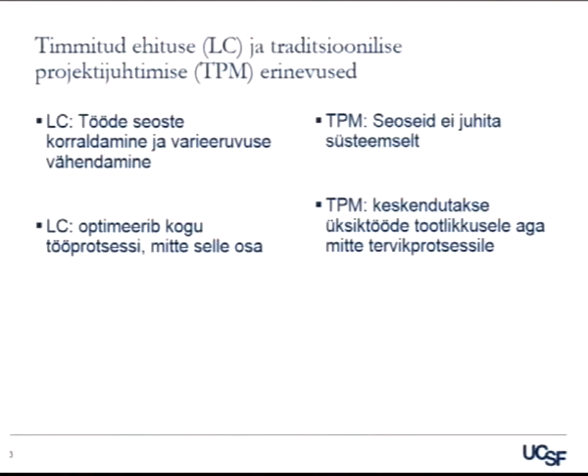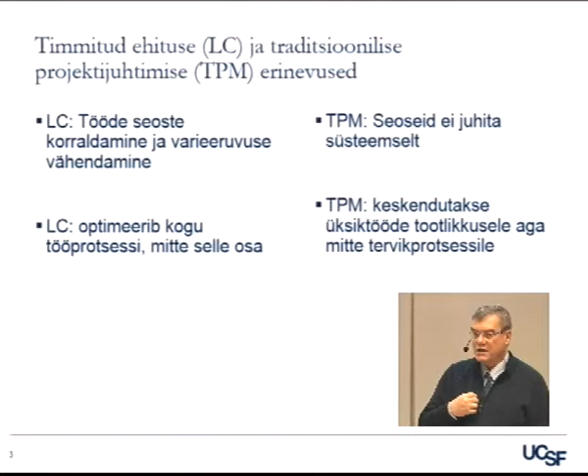So some differences between lean construction and traditional project management. I've put these slides in for you to read at another time. I don't want to talk through each one. I think it's pretty evident what the differences are. But on this first slide, the two points about lean construction, managing the interaction between activities and their effects and optimizing the workflow, is for us the key fundamental philosophy.

Why do we do this? It's because the problems that we have had in the past with design and construction of buildings all result from the old process, which cannot do these two things. And I am both the person who conducts the orchestra, and I am the impresario of the circus, and then when the circus parade goes by, I go and clean up.

So when a project finishes and the results were not satisfactory, I have to fix it. So I am involved in lawsuits, litigation, and I hate that. So with Lean, we've stopped having to do any more cleanup after the project.

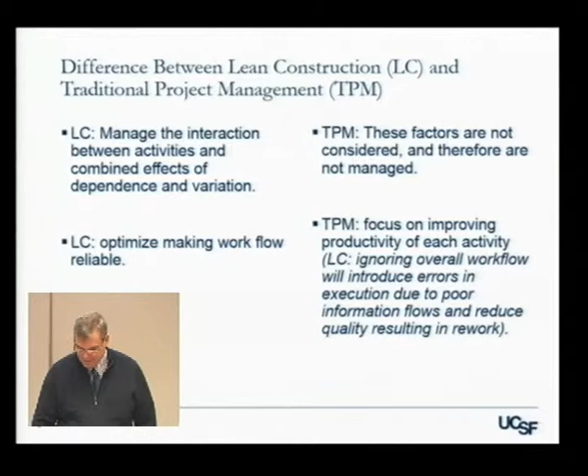So there are 4 slides that talk about the differences. What Lean construction tools do you have to accept in order to get the benefits from this process? The first one that I put is shared project control. In traditional construction, at least in America, the control is a value that the owner or the general contractor try to monopolize. And to do Lean, you have to share the control of the project with the people who are doing the work. And in sharing that control, they take responsibility. That's a fundamental principle that makes this whole process work well.

We try to optimize the whole system through collaboration and learning. We seek continual improvement, although we know that perfection is impossible. We focus on delivering a project that is desired by the owner. In this case, the owner is a community. We are an academic community, and the asset, the building, needs to support the way that community works. This is a complex question in design, and if you don't have a project that is focused on this, it will fail.

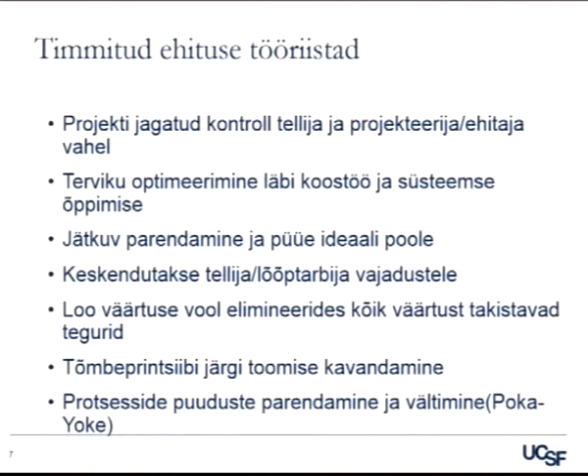We try to create value flow, or the flow of value into the project through the decisions that are made by the designers and the builders by removing obstacles to the creation of value. We try to create pull production, and we try to mistake-proof the process. All of these are very large subjects, and when I look at our projects, I do not feel like we are experts. We are just beginning to learn how to do this.

With the last planner system, developed by Professor Glenn Ballard, Greg Howell, and Lauri Koskela in Finland, we use this throughout our projects.

We first create a milestone schedule, and then the community process of doing the design and construction begins. The people working on the project collaboratively pull schedule each milestone phase, and the list of tasks they need to fulfill is under the weekly last planner workflow management process.

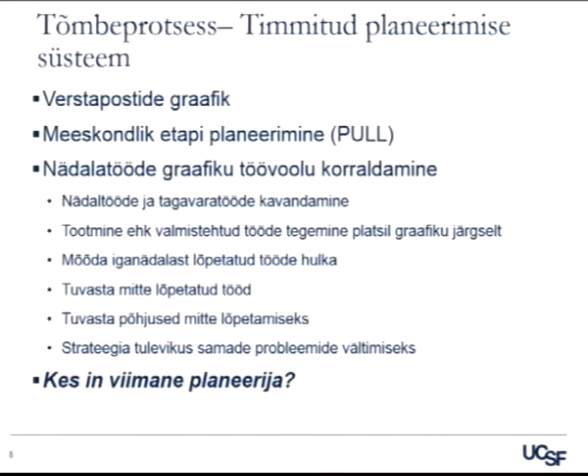But I want to ask, who are the last planners? The answer is the people working on the project. The point of the last planner system is to push control of the process down to the people doing the process. So when you're in design, as Romana will talk about, it's the people working on the design who are scheduling and managing the process. If you're on the construction site, it's the people doing the construction work who are managing that process. The lower down you can push the responsibility, the better the outcome.

We use target value design to design our facilities. This is the result of about 8 years of experiments.

We build buildings that we will use for hundreds of years. In fact, we have a project right now to renovate two buildings that are 100 years old for the next 100 years. So when the university builds an asset, it builds it with the intention of keeping it forever.

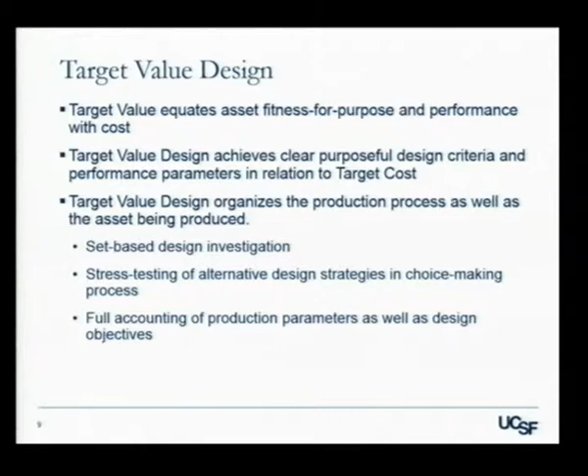This is very important because fitness for purpose is really the definition of value. We try to develop clear, purposeful design criteria and performance parameters that designers and builders can use to know what value they are creating. I will use the example of the building later to talk through this process.

Target value design organizes the production process as well as the asset being created. An example of this, which I'll talk about later, is the office building. It was a design-build competition, and on day one, the people who were going to manufacture and install the exterior of the building were at the table with the architects, helping to design the building, so that the deepest technical questions were being addressed from the very start of the project. This is very desirable.

We use a big room organization on our projects. We are lucky enough to have enough land to make a big room. Sometimes this is a challenge - where do you put the construction trailer that becomes the design office as well as the site office? But what we are trying to create is an integrated team workplace.

We are a very large business, in fact. We receive more than half of our revenue from clinical services. We operate 2 hospitals of our own, and on February 1st a third will open. We also provide the doctors for 2 more hospitals in San Francisco. So right now 4, and soon 5, large hospitals.

And we receive a very small amount of money from the state to fund education and some collaborative research. So we are almost a completely private institution.

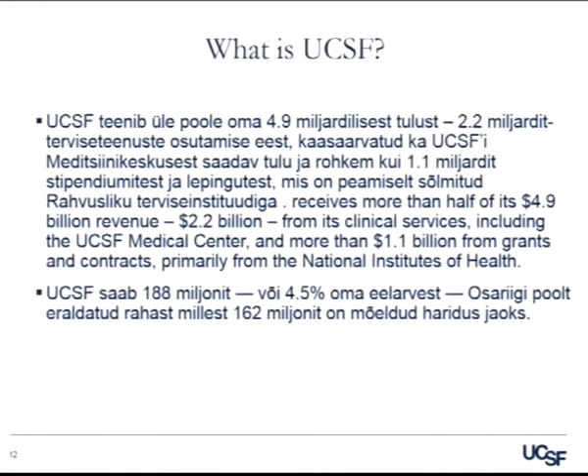We have many sites in San Francisco, 3 main ones: our Parnassus campus, which is the traditional core of the university; a new campus at Mission Bay; and a small campus at our Mount Zion Hospital.

We are an urban campus. Other campuses in the UC system are buildings in a park, all in one place, with green lawn between the buildings, and it's very nice. Our sites are mostly urban, with a completely urban character. That means we have a deeper relationship with the city of San Francisco in terms of planning than our other campuses.

This is a large enterprise, and we have many challenges, one of which is that we do not have enough capital for all of the purposes that we need. We are growing a new research campus at Mission Bay, and yet we are reinvesting in our existing facilities.

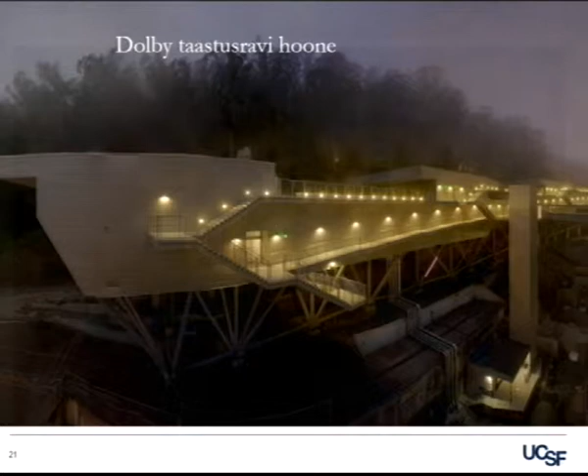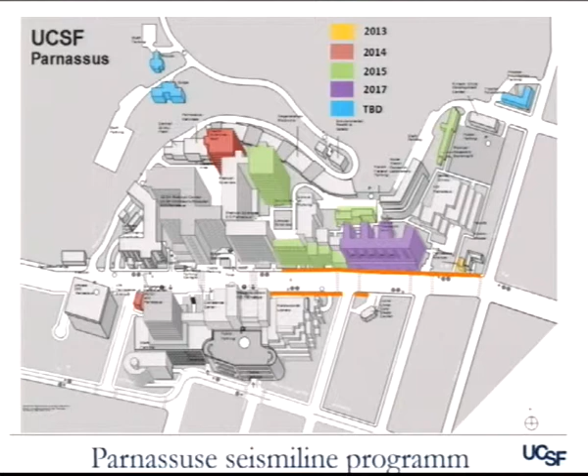So for major projects, for projects that are hard to do fully design build, we use the CM at risk with design build subs. And then for new standalone buildings, we use the target value design build.

So what is target value design? Target value design is a practice that tries to deliver what the customer values and develops the design within project constraints. That's a very abstract way of saying it. A more poetic way is an application of engineer Ohno's advice to lower the river to see the rocks, to self-imposed necessity as a means to innovation and continuous improvement. Engineer Ohno was the man at Toyota that developed their version of lean. It strives to reduce waste and rework in the design estimate redesign cycle.

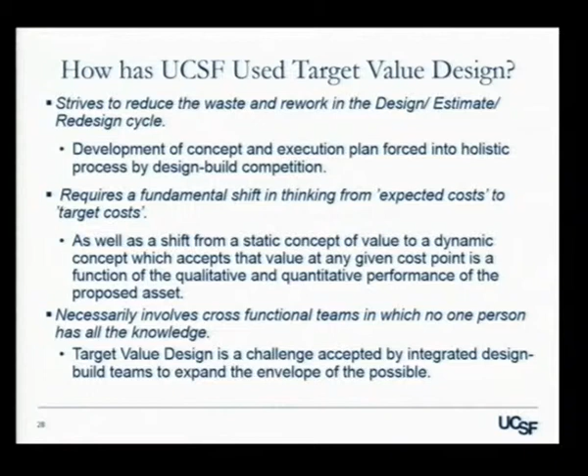We are using in this process a dynamic concept of value, which accepts that value at any given cost point is a function of the qualitative and quantitative performance of the asset. So we're regarding a building as an asset. It's something that is going to support our medical research, our clinical care for 50 to 100 years before we really renovate it. And we want to know what we're getting for the money. And so this is how we do it.

Target value design is a challenge to design build teams to expand the envelope of the possible. So the cost that they will get for the project is fixed. The variable is how well does it perform.

So we use maximum allowable cost as our design build cost target. The competition for the project award is used to maximize the building performance for a fixed cost. The performance specification allows measurement and valuation of the asset performance quantitatively. We translate it all into numerical values.

The design criteria allows measurement and valuation of asset performance quantitatively, and we use a ranked scoring system so that the top ranked proposal gets 100% of the points in any one category. The second ranked proposal gets 2/3, and the third ranked proposal gets 1/3. And this takes bias out of the judging process. Usually it's much easier to say which proposal performs best, and then the points come automatically.

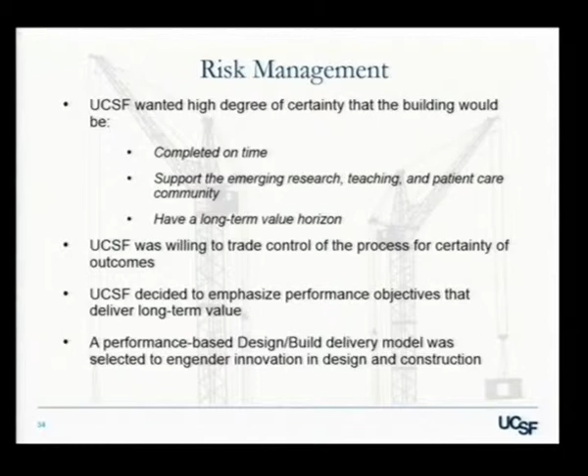So I want to talk a little bit about risk management. Because the hospital was going to open on a date certain, we needed this building to be completed on time. We needed to support the research, teaching, and patient care community that would be in the building and have a long-term value horizon. We were willing to trade control of the process of design and construction for certainty of outcomes.

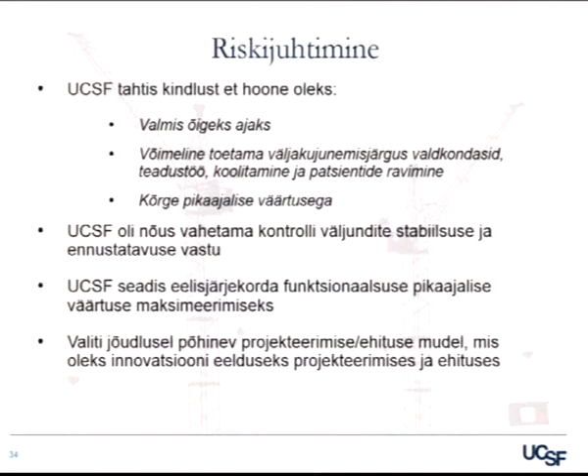We decided to emphasize performance objectives that deliver long-term value, and so that's why we decided to use this delivery model. As I mentioned earlier, we have a 3-level performance specification that we use for a design-build competition. The tiers allow us to categorize performance. We had a fixed cost of design and construction of $93.8 million, including furniture and a high specification IT system.

We had a fixed program. We used a best value process to award the contract. Basically what that is: score the proposals, divide the score into the cost, and award based on the lowest cost per quality point. In some projects, it would not be a fixed cost, and the winner might not be the lowest cost. But in this case, we had a fixed cost, and so it was really who got the most value into that fixed cost.

This is important. The contract is to design and build a building with the specific performance levels proposed in the competition submittal. So often a construction contract is to build a building, and the design contract is to design a building, and somewhere in between the two, a guarantee of performance is lost. It's very hard to enforce. This contract, the guarantee of performance, is very simple to enforce. If they don't meet it, I make a phone call. They come and fix it. It's a huge change in a country like America where everyone is fighting all the time with lawyers.

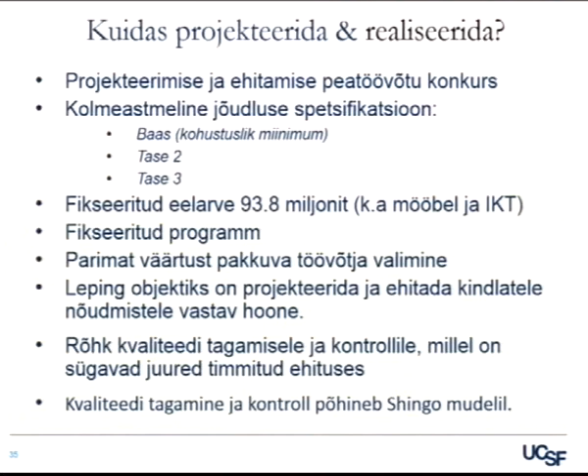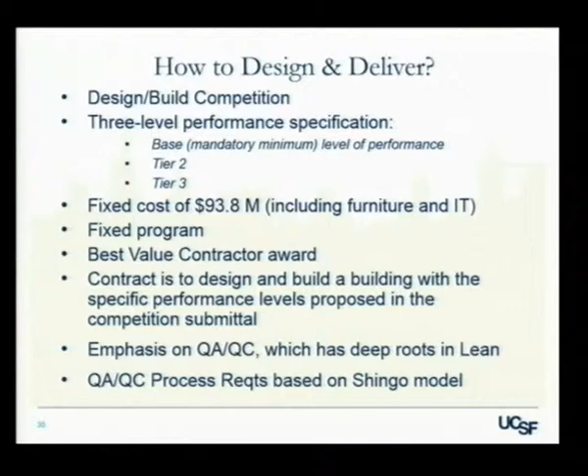Our contract emphasizes a quality assurance, quality control process, which has deep roots in Lean, and we actually use a pretty straight Shingo model. Shigeo Shingo was one of the originators of Lean in the automobile industry in Japan, as a framework for asking the team to create a quality assurance program for the project.

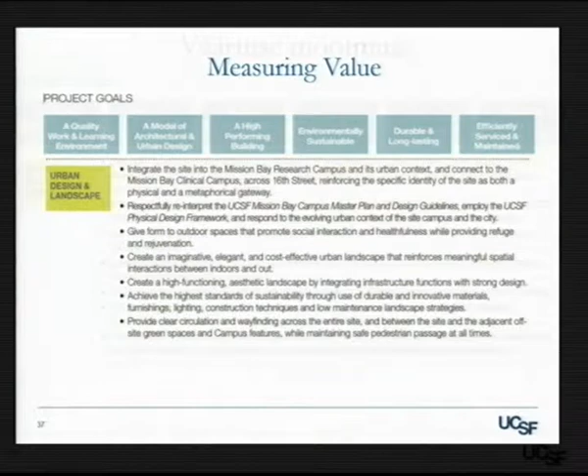So we developed planning and design criteria, 400 pages. I can't go through all of that in this talk, but this is the very highest level of performance setting. We wanted a quality working and learning environment, a model of architectural and urban design, a high-performing building, high level of environmental sustainability. We wanted it to be durable and long-lasting, and an asset that we can efficiently maintain. Those are the various highest level expressions of the performance desire, and then we work it down and down with more and more detail in the document.

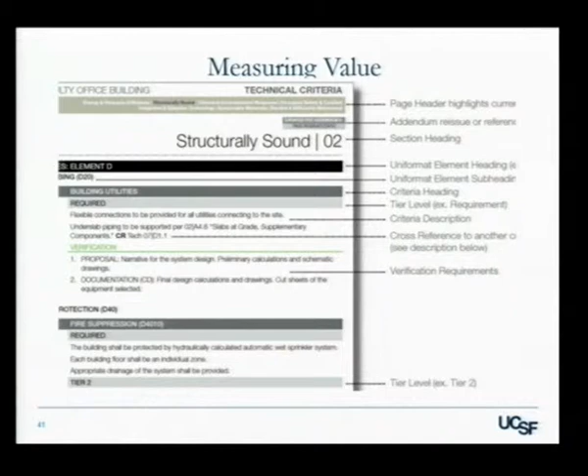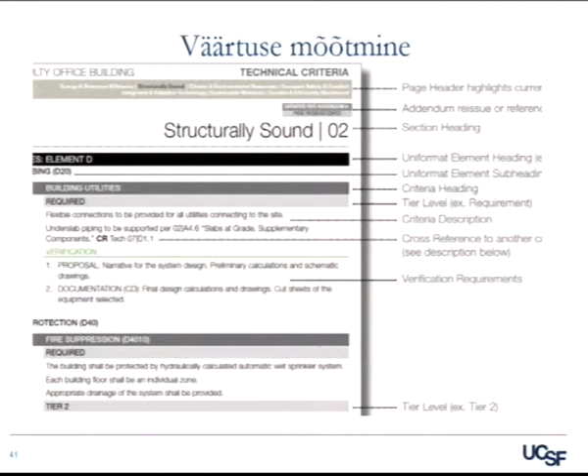Just an example of a page from the technical criteria, this is around structure. We required a very sophisticated structural design methodology that uses what we call a non-linear analysis, which is a 3D computer model that is stressed with known earthquakes repeatedly, and then a Monte Carlo simulation is built out of that. So many thousands of times with 6 or 7 different earthquakes, and then you can see probabilistically how the structure will perform, and then you can make modifications that address the issues that come up. This is just an example. I can share this document with people if you're interested.

Then the consulting team evaluated the technical criteria. We worked with the users, a group of 27 faculty members, to evaluate the design quality and the way that the interior is designed for fitness for purpose. We published the evaluations for each of the 3 proposals, and then we did a ranked scoring exercise. This is a score for one of the contractors, and we enumerated how many times they met the base or required level, how many times they did not, and how many times they met Tier 2 and Tier 3, which are 2 higher levels.

I'm going to have to take my sweater off because it's very hot while I'm wearing it. It's standing by the radiator. That'll do, that'll work.

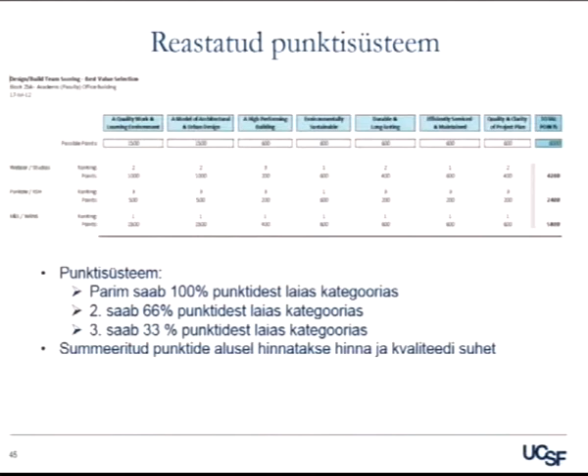Then we compared all 3 against each other, and did the calculation of the cost per quality point, and we had a winning team. What we got for our money was quite a lot. This is a cost that is below the private sector cost in San Francisco for a similar project. The structural performance is much higher than code requires. Immediate occupancy is actually a technical description in California structural engineering. It means that for a given class of earthquakes, you can walk in and use your building. Not only is the structure fine, but all of the non-structural systems, the IT, electrical, and plumbing supports, no broken pipes, no broken wires, the building works, it's still watertight. California has the toughest energy code in the US, and the performance of this building is calculated to be 25% better than the energy code. And most important, the faculty committee evaluated the winning proposal highest of all for workplace design.

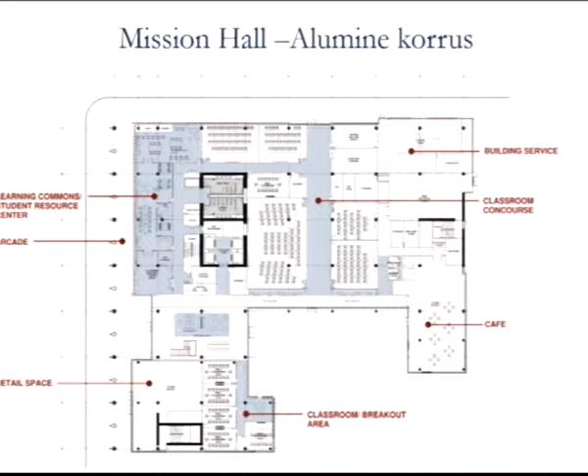The ground floor is mostly classrooms and some retail and the back of house support space.

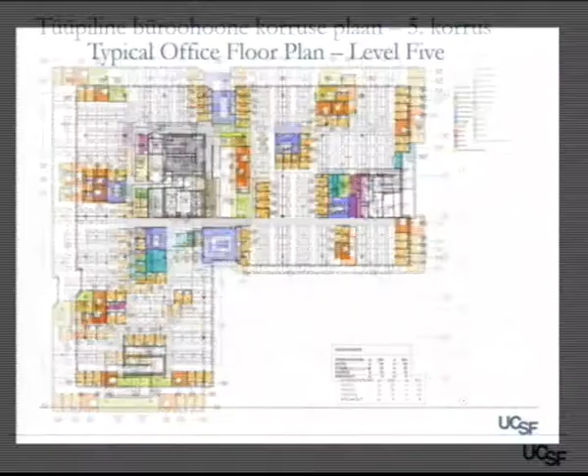A typical office floor won't look like anything you've seen, because this is an activity-based workplace. Nobody has a private office. All the senior faculty have open office workstations just like everybody else, so space is not part of the academic reward system anymore. If you need privacy, you go to one of these little yellow rooms whenever you need it, no reservation, walk in, work for a day or half a day, have a conversation with somebody. When you're done, you leave and go back to your desk.

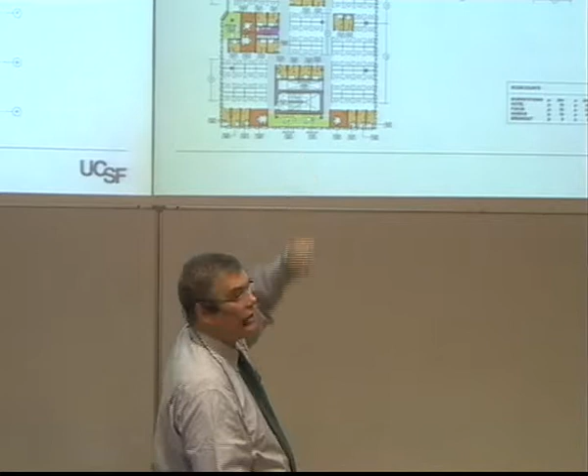If your team needs a place to work, you can grab one of these, no reservation needed. Only the larger, bluish rooms need a reservation. Most of the time, the people who have a desk here are working in the hospital, delivering medical care. They come here 2 hours a day.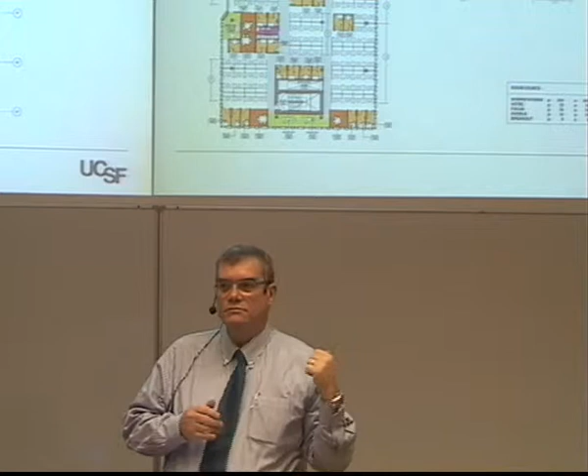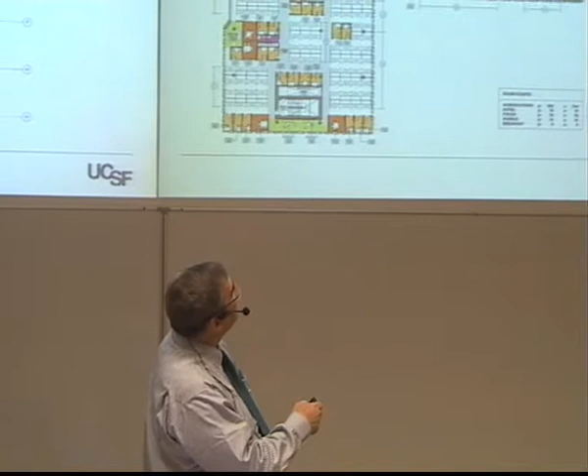So they'll have their academic workplaces here, but if they need to write a paper, they might take one of these rooms, or this one, or that one. It's fine.

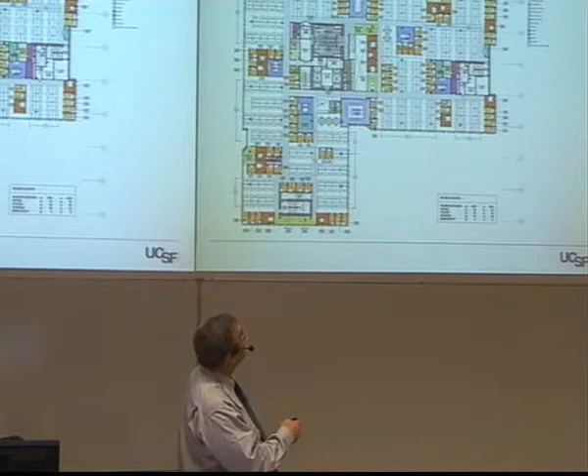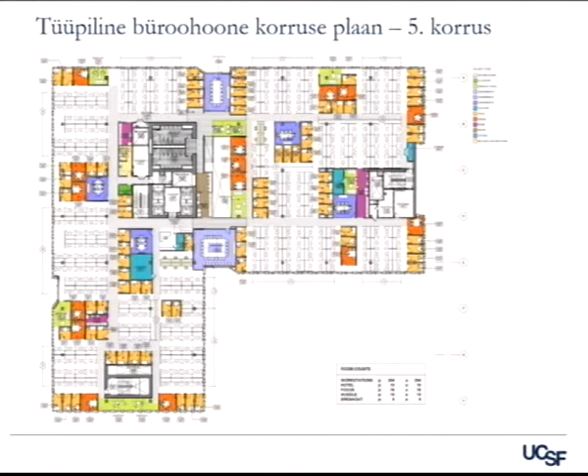This allows us to fit many more people into the building than if we had a traditionally designed building. It also simplifies the management of the facility. Everyone gets the same workspace, so you don't have to manage having more faculty than offices, which is actually typical for us. You can always fit somebody in until the building is full.

One of the things that Lean does is make management visible, and the site superintendent for the contractor that built the building made this schedule. If you look at it, it's a section cut through the building, and he has marked the months across. Then you can see the construction activity. The green lines here are shoring, this is the concrete construction schedule, and the shoring was removed from the top levels at the end of January.

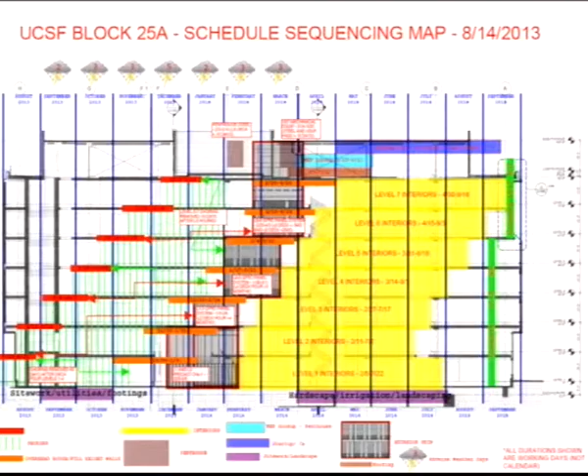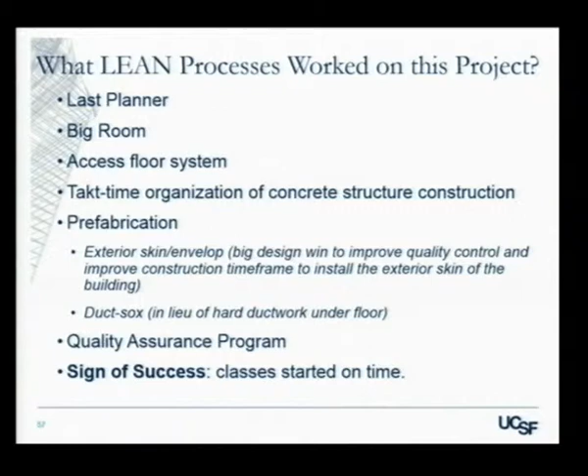On this project, we used Last Planner. We used the big room. We used an access floor system in the building itself, which allowed many benefits in construction. We had a takt time organization of the concrete structure construction process. We used a lot of prefabrication for the exterior envelope, and we had a quality assurance program as part of our commissioning process. Classes started on time and the building is working beautifully, which typically was not our experience 10 years ago.

The concrete decks were 10.5 inches, and the shear walls were 800 millimeters, so it's a very heavy concrete structure, with lots of reinforcing as you can see.

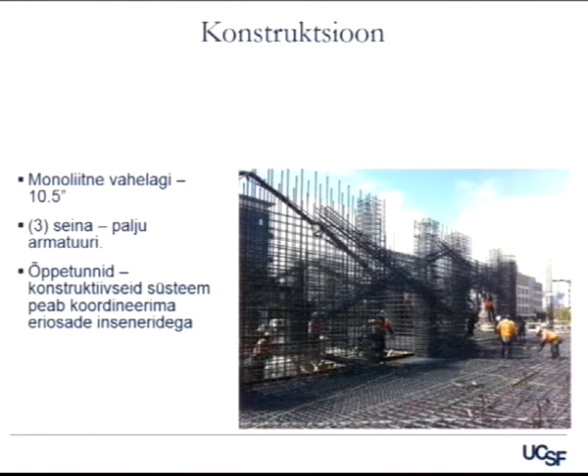We had to figure out how to build the reinforcing quickly, so we actually spent money on more reinforcing, which simplified the construction so the whole process went faster. That's an example of the kind of choice you make in Lean, where you're not letting one detail drive the whole. The detail of reinforcing is not driving the project; we over-design the reinforcing so we can get the whole structure done more quickly.

We built the floors on a 5-day pour cycle, 15 days for each deck, which is fast.

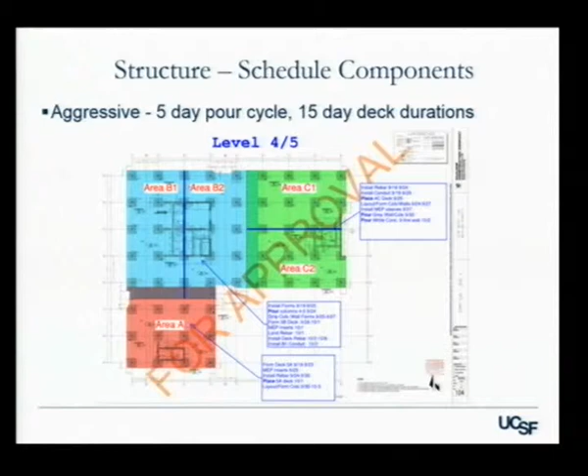Example of the schedule flow for a piece of the structure.

We used A3s for making critical decisions during the design and construction process. This is just an example, I'm not going to go through it, I can't even read it on this screen.

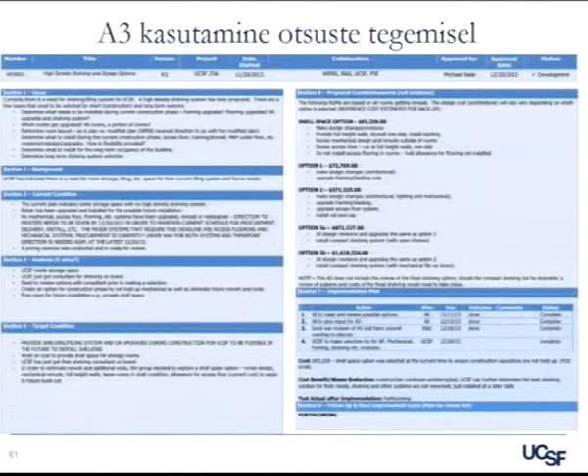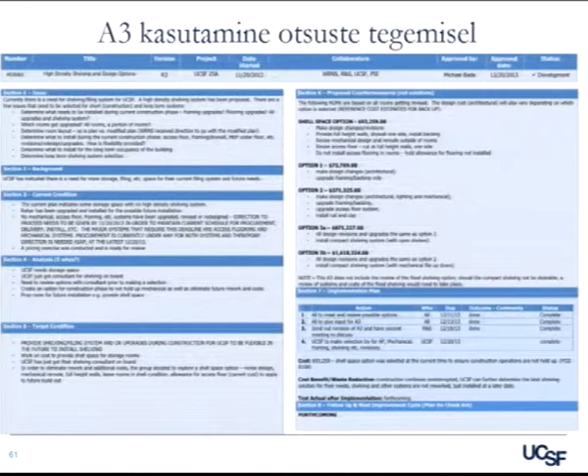We had questions about how to handle the academic records that were being brought. Many of the professors are working on clinical trials of medicines or medical devices, and clinical trials require a submittal to the US government for approval of the medicine or device. So the records they keep are very large record sets, very heavy in paper. We studied this using an A3.

We did a lot of off-site fabrication, especially of the exterior envelope. 361 panels, and I'll show you.

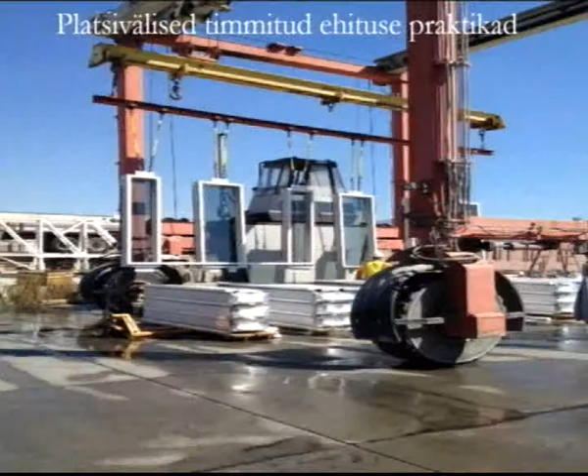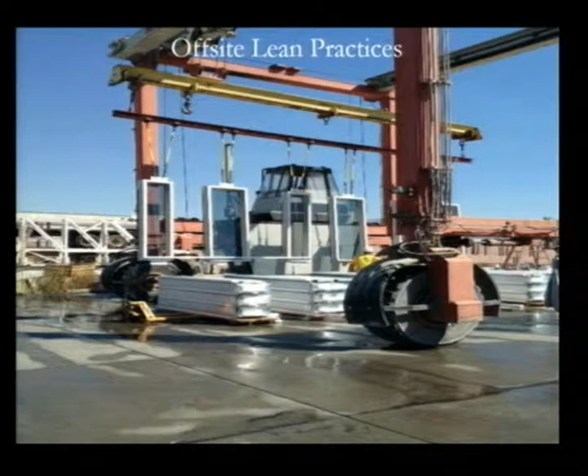The company that manufactured and installed the exterior built this rig with the opaque panels, the glass fiber reinforced concrete panels, and the windows set up so they could install them and build the panels in the yard. This jig allowed them to do an entire panel.

So that panel goes from here to here, actually to here. This is solid, it's going to go right there. These are finished panels - solid glass, solid glass, solid glass. And then they went on the outside of the building.

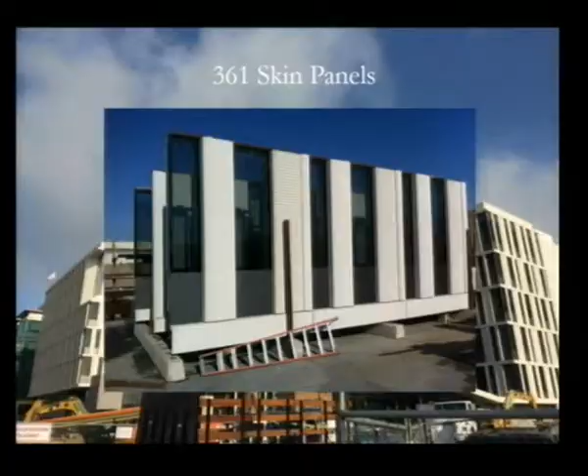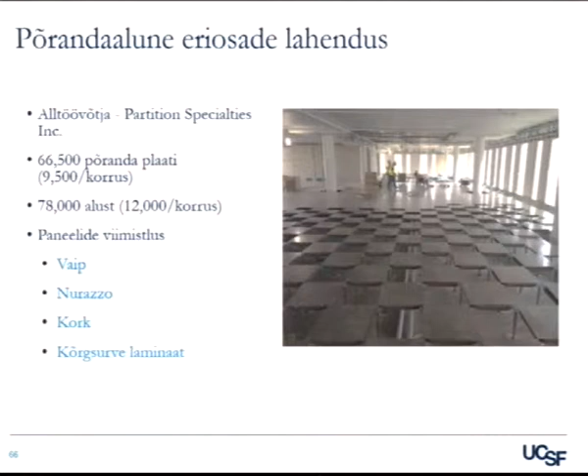We put a raised floor system throughout, which distributes air as well as IT. There were 66,500 floor tiles and 78,000 pedestals, and a number of floor finishes.

The big room was a really essential element of the process because it allowed people to really get to know each other and develop good communication, so that if a problem came up, they were friends rather than enemies. You can work out a much better solution with your friends than with people you don't know or only know a little bit.

This is a very, very powerful process. And it doesn't require any more technology than a piece of paper with some sticky on the back.

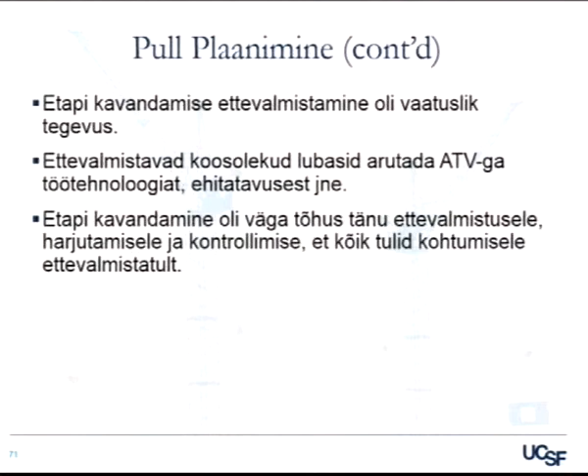This is just a lot of information for the deck that will be distributed.

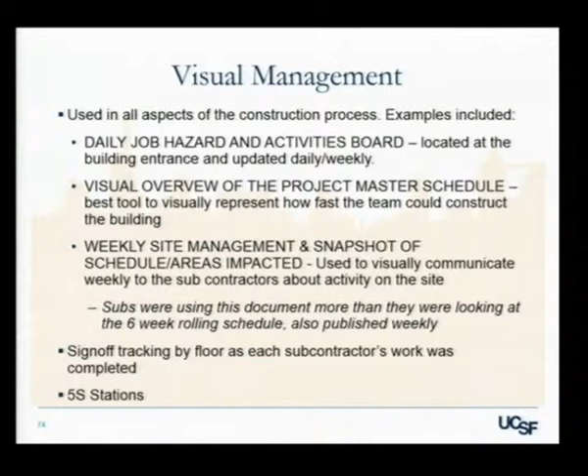Visual management was used on the construction site, and we had a bulletin board which explained to the workers where the hazardous activities were going to take place every day, so that they would know and be able to stay out of the way. We also posted the visual overview of the master schedule and the weekly site plan.

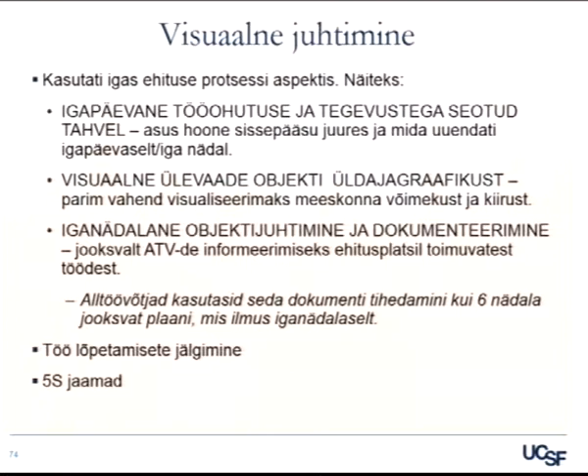Here's an example of a slightly different visual management on the site, but this is about keeping the project clean, which they did a very good job of.

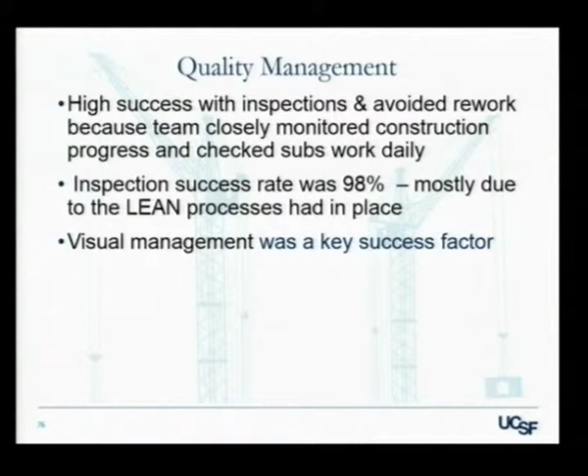The quality assurance process worked very well. 98% of all inspections were passed, and the visual management was really a key success factor in that.

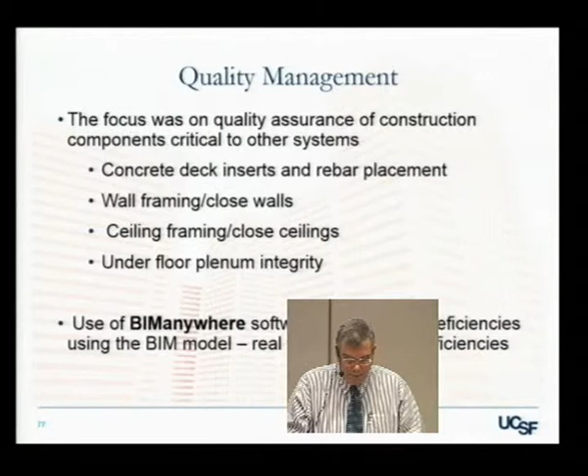We focused on some critical processes like concrete deck inserts and rebar placement, on wall framing and closing in walls. In the few places we had ceilings below the slab, we focused on that, and on underfloor plenum integrity.

Having an office air system that depends on a raised floor, you have to limit the leakage from the floor plenum to about 11%, which is calculated into the ventilation. If you have 20%, you're going to have ventilation problems. Making sure that the floor plenum was tight enough so that it performed within specifications was a very important thing to do.

The team used BIM Anywhere to track all the field deficiencies using the BIM model, which allowed for real-time tracking and allowed for the people who were going to fix the issues to know exactly what to do.

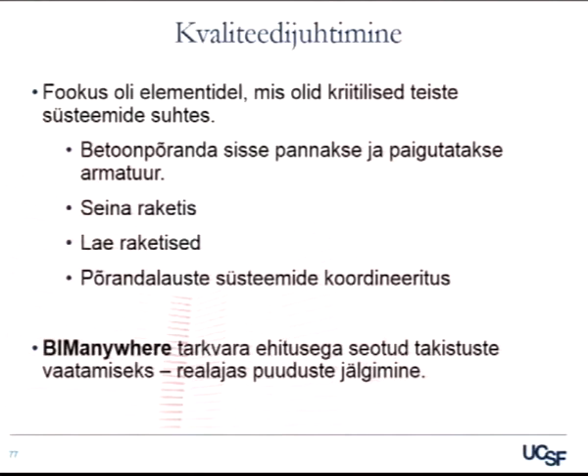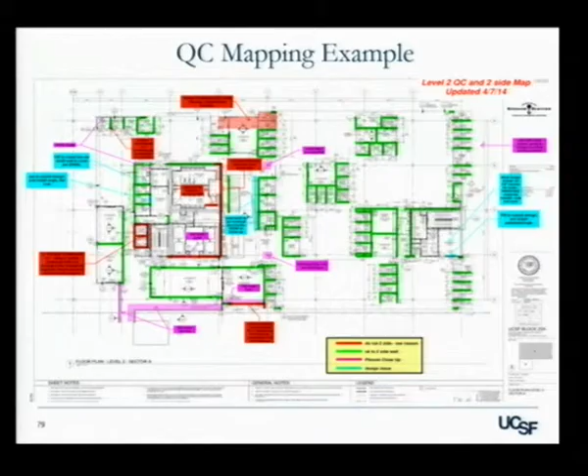This is an example of how they used mapping in the quality control process.

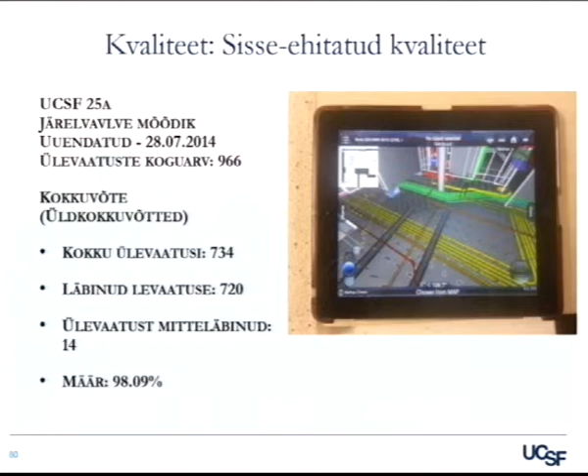The last planner plan percent complete rate for the project as a whole was 83%. The system really allowed the foremen and superintendents to commit to each other what was going to get done. What was really important is commit to each other, because they're making promises to each other about how they're going to do the work together. The weekly negotiations regard the commitments they make, the handoff points, and achievement of mutually desired outcomes.

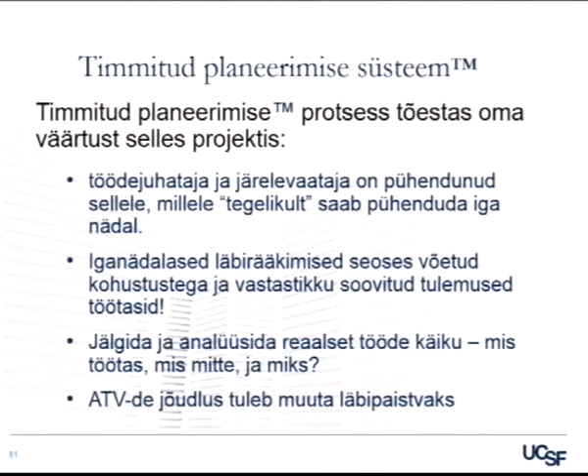I think the biggest takeaway from this process was that training people over time to understand the fundamentals of lean construction and the big picture expectations for the project really paid off. We had a team of builders and designers who worked together like this, and that was very powerful.

Our construction company project manager's lessons learned was: don't let project execution run on autopilot, and don't take anything at face value. Always confirm that people can meet their commitments and make sure to review their backlogs.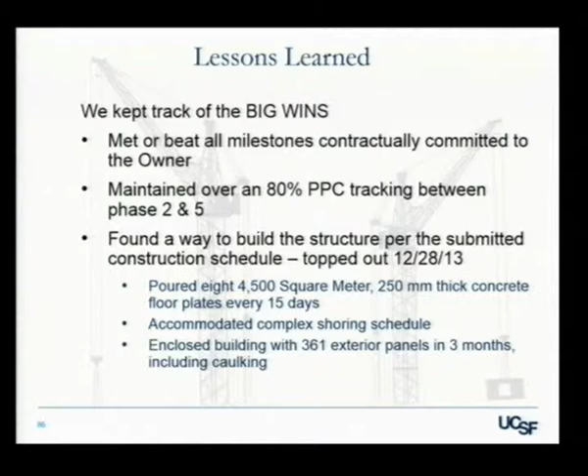So the team met and beat all of the milestones that they contractually committed to. They maintained an over 80% percent plan complete, and they found a way to build the structure, which was very complicated per the construction schedule.

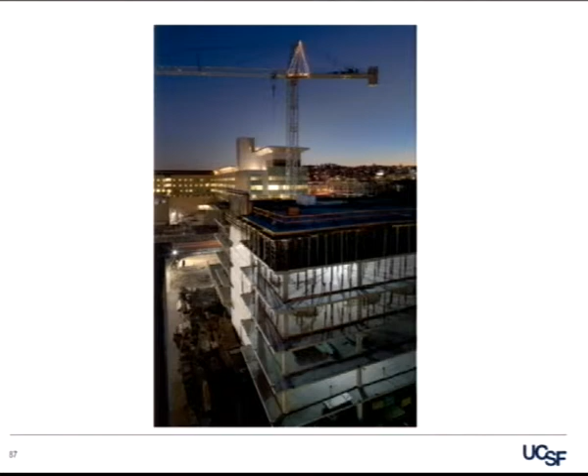This was when they were just about to start removing the shoring from the upper levels. It was Christmas time last year, and the project site superintendent made a Christmas tree on the tower crane. So here are some pictures.